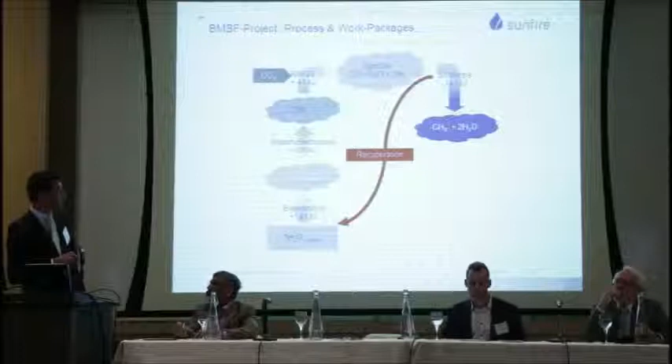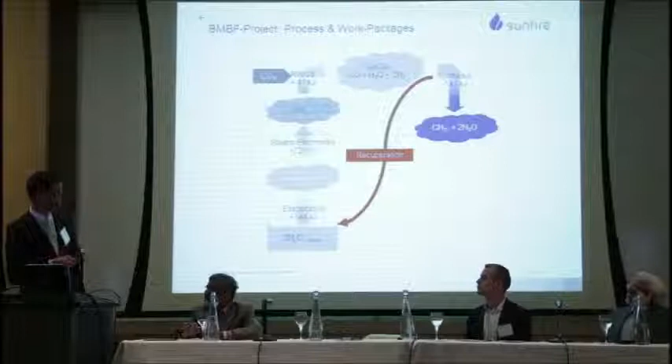The synthesis is always exothermic, so you will always lose energy that you used to turn liquid water into hydrogen if you cannot use this off-heat to produce steam. If you can produce steam, you will be able to apply the SOEC, which then takes steam to produce hydrogen and not liquid water, thereby saving 16% of energy in the very beginning of the process, and 16% energy efficiency increase in an energetic process is tremendous.

Some of you may work in the refinery. If you get 0.5% more efficiency in a refinery, you will be a millionaire. So 16% more efficiency is good. This is why we work in many institutes and companies worldwide on the steam electrolyzer.

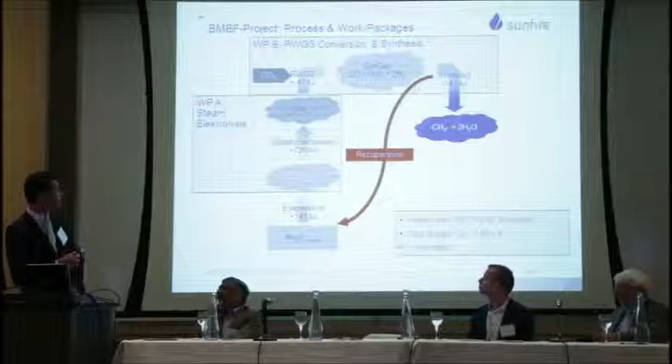We're currently having a project, sponsored by the BMBF, the German Ministry for R&D, and we have 2 main work packages, though there are more. Work package A is steam electrolysis, and work package B is taking the hydrogen from the steam electrolyzer together with CO2 and turning it into hydrocarbons.

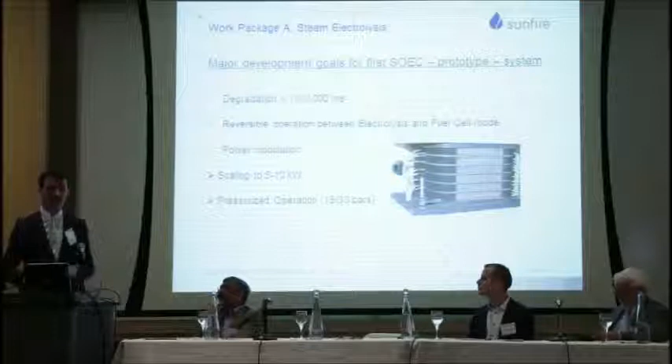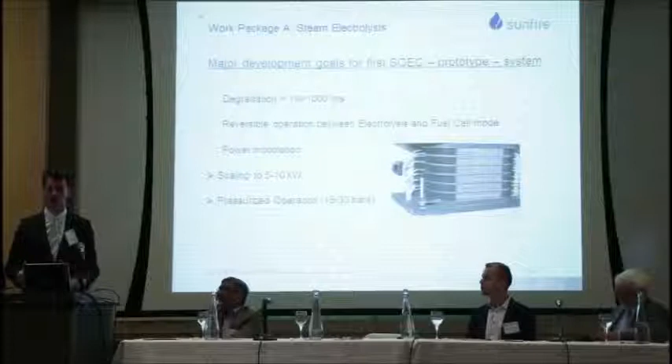Where are we at the steam electrolyzer? This is important: our goal was to create a stack generation with less than 1% degradation per 1,000 hours, that can be run in a reversible mode. On one side, produce hydrogen - once energy is there, it needs to be stored. On the other side, also take hydrogen or hydrocarbons and turn them back into electricity once this is required, and that can modulate flexibly according to the energy input from renewable sources. We also want to scale it towards 5 to 10 kilowatt, and run it at a pressurized level.

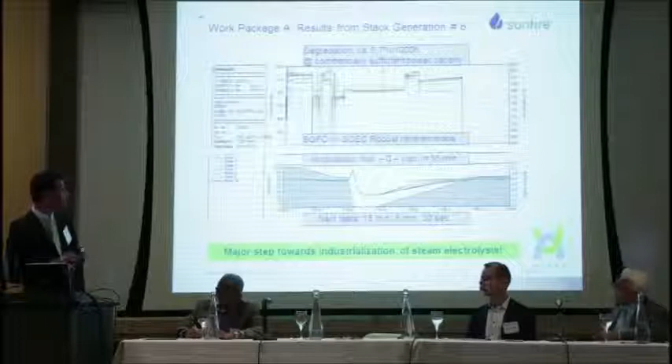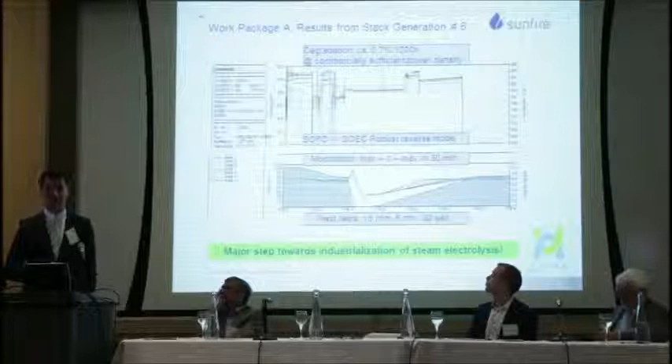And here we are regarding our development: the degradation is currently at 0.7% per 1,000 hours. That is really a very encouraging result. When we started 15 months ago, our degradation was 5.6% per 1,000 hours. So this is really good, and this is also at a commercially sufficient power density. I don't want to bore you with details here, but this is driven commercially.

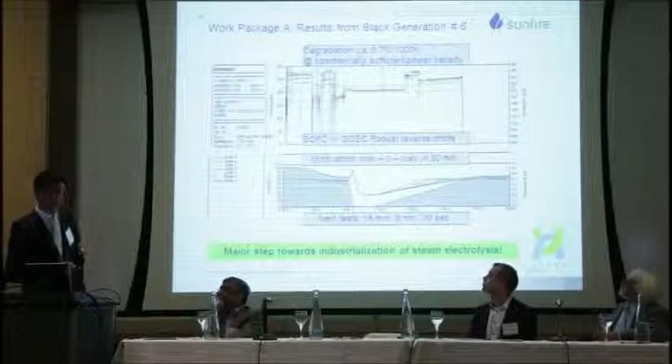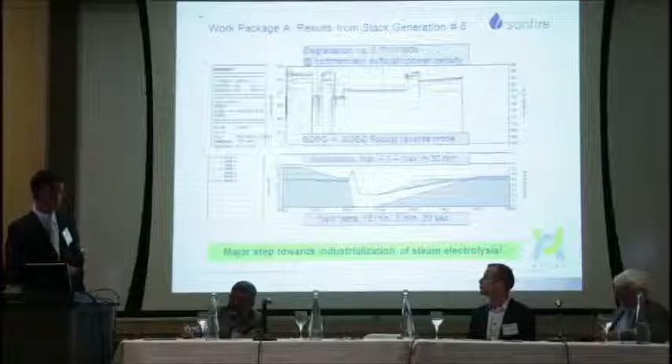The second thing is it is a robust cell and stack that can be run reversibly between SOFC and SOEC. The third thing we have shown is that we can modulate from maximum to 0 to maximum power within 30 minutes. We will now do tests towards 15 minutes, 5 minutes, and eventually, hopefully, 30 seconds. I have not convinced my people yet to do it, but I will do it in the end. This is really a major step currently towards the industrialization of steam electrolysis.

Steam electrolysis always has the reputation of not being industrially viable. We hope that this will change within the next month. These results are brand new, and we are currently publishing them in Germany and Europe.

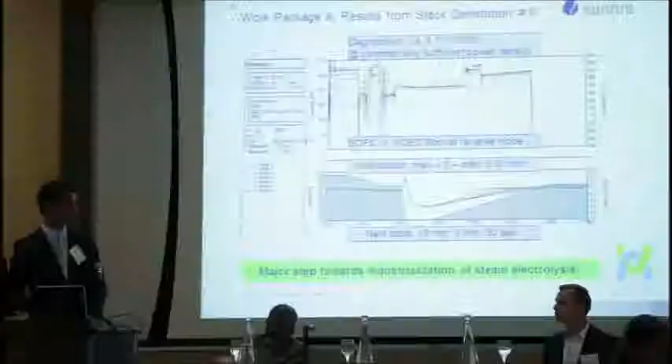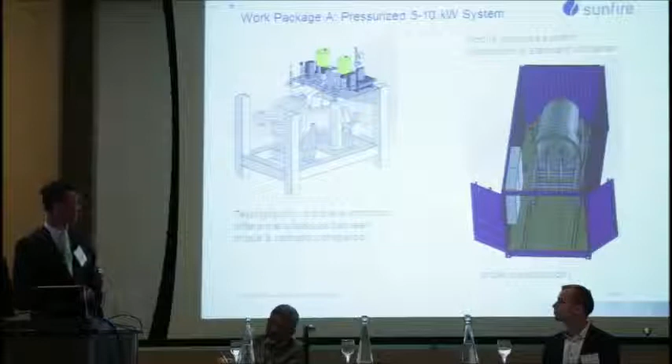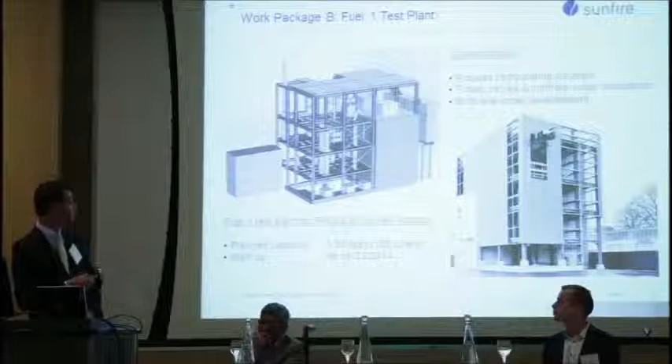This was work package A. Work package B is the current status of our Fuel 1 test plant. This was the plan, and now it's becoming real. This was the status in February this year.

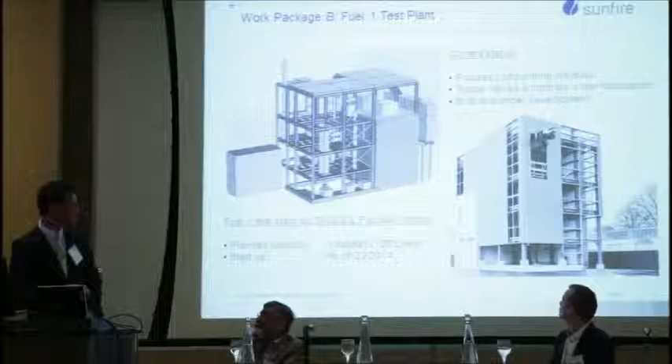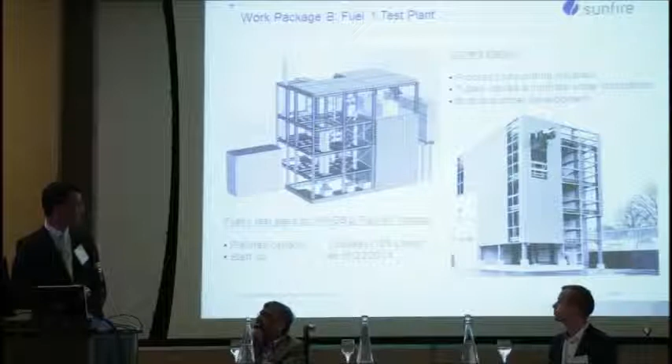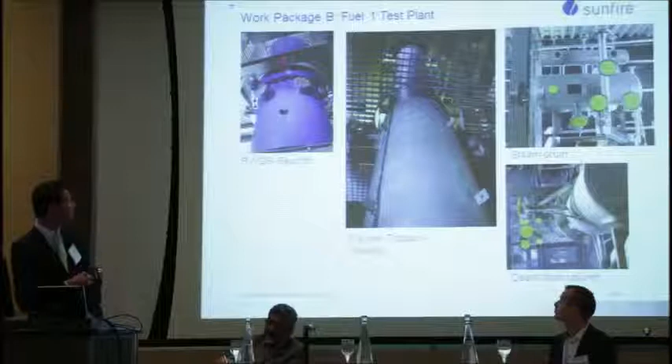I want to show you some pictures. This is our reverse water gas shift reactor, 3 meters high. Some of you know what this is important for. This is our Fischer-Tropsch reactor, 8 meters high and about that diameter. So it's a real Fischer-Tropsch reactor, not a lab scale anymore.

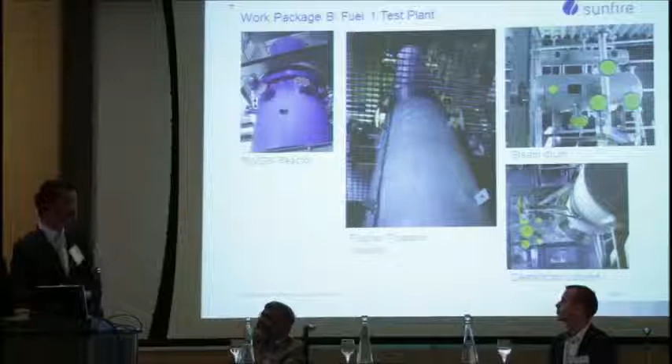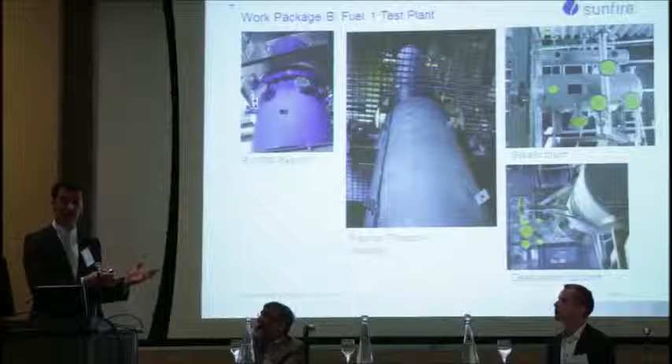This is our steam drum, which takes the exothermic heat from the Fischer-Tropsch generator and provides it to the electrolyzer so that we can use steam instead of liquid water and thereby save the energy, which I explained in my introduction. And this is the distillation column.

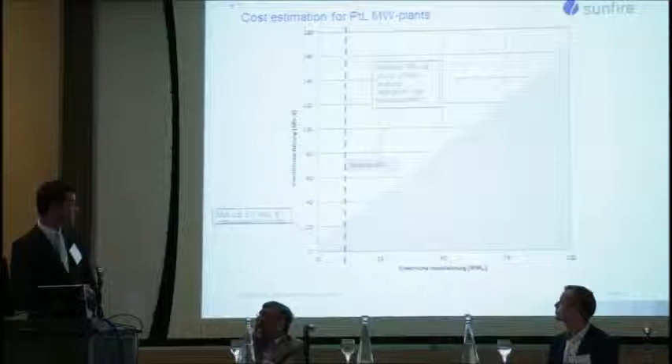Now, we talked about the commercial viability of energy storage via liquid fuels, PTL, power to gas, whatever. Here I show you some cost estimation for the megawatt scale. And the problem is that if you build such a plant as you have seen here, you will not be able to go below something like 5 million euros, because you have certain installations—the number of tubes is the same, the number of valves is the same, the controls are the same, and so on.

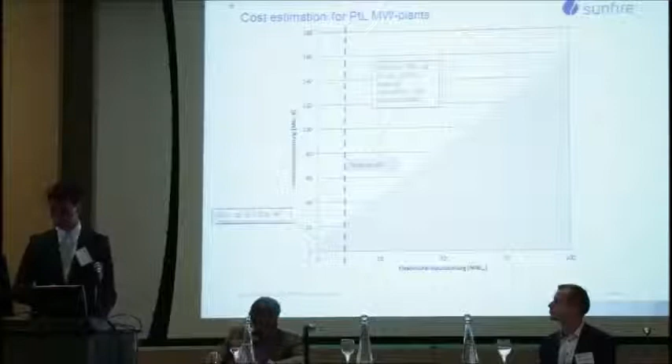So even if you produce just 1 liter of fuel per day with this kind of plant—one that can really provide high quality fuel—you will probably not end up below 5 million euros. So you will have to get a certain scale in order to get a positive IRR. We currently guess that 10 megawatts would be something we could run at a positive IRR. But there are regulatory risks which I want to emphasize later. So it's a risky business model because it depends on government regulations, and no investor will believe the government will keep up those regulations for 20 years.

Let's get away from the technology. What is the strategic problem for storage technologies and business models currently? The Energiewende in Germany, the conversion of the energy sector from fossil to renewable sources, needs storage capacity to ensure two things.

In the new Energiewende scenario, it's different. The consumer becomes a prosumer. He also produces small-scale energy and feeds it into the grid, and this energy then needs to be distributed via the grid to other prosumers. The problem is that those grids are not large enough to cope with the energy feed-in, so we have bottlenecks within our system. And therefore, we need a compensation load and can store via power to gas or power to liquid.

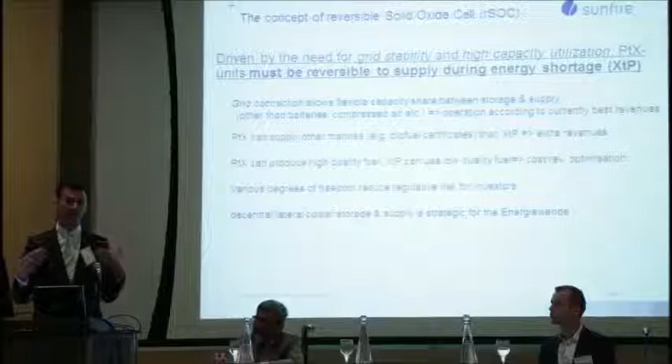And those various degrees of freedom will help us decrease the risk for the investors, because under changing regulations, they can always change their mode of operation from SOFC to SOEC and back, and they can change the fuel they use, they can change the market that they sell the produced or stored fuel into, and so on.

So from the first response that we got from investors, this is a far better business model than any pure storage unit. I have to say that here.

I know this may raise some questions, I'm looking forward to the discussion. But we at Sunfire believe that in the next 5 years, we'll probably not be able to sell large power storage plants if we are not able to run them reversibly. Maybe we'll find an investor to build it, we will be happy to build it, but currently we have not been successful yet.

I'm done. And the other thing is it will be a decentral power storage and supply unit, which is strategic for the Energiewende, as I heard earlier. Let's make it real, and thanks for your attention.

Okay, so this is going to be a slightly more technical presentation.

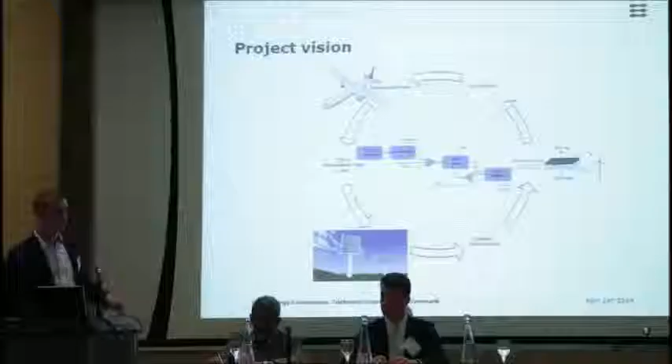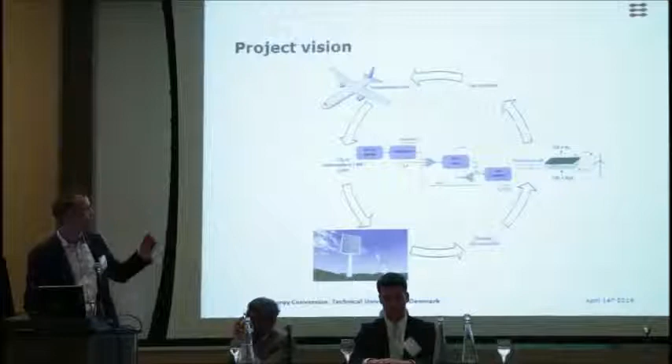You've seen various versions of this figure before. We just heard about doing steam electrolysis and then reacting with CO2 afterwards. The vision for the project I'm working on is capturing CO2 from the atmosphere, as we heard before, and then doing co-electrolysis: you feed both the steam and the CO2 into an electrolyzer cell, and then produce fuel. In a conceptual model of what such a system could look like, we have the air capture part, then a purification step and a pressurization step before we reach the electrolyzer stack. Those are the two focal areas of my project, and what I'm going to talk about here.

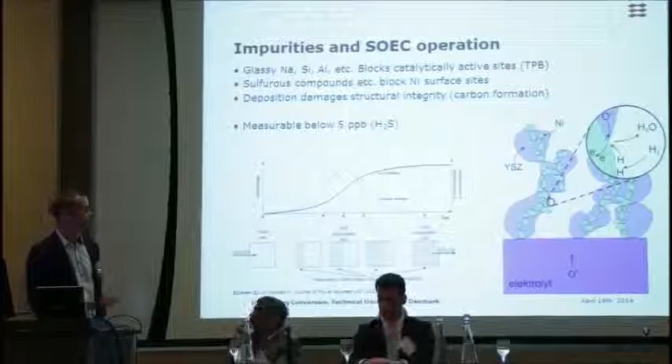Just a little bit about solid oxide electrolyzer cells. If you look at the figure on your right, that's a half cell consisting of the electrode where the electrolysis reaction takes place. The blue phase is a ceramic backbone that conducts oxygen ions, the green phase is the electrocatalyst, that's nickel, and the white background is a porous phase. Where these three phases meet, we have the three-phase boundary, and this is the catalytically active site.

I'm telling you this because this is one of the main areas where impurities in the reactant gases sit, react, and form glassy phases that can block these sites. Also, the nickel surface is active in the process, and various chemical species will adsorb on the nickel surface and block that. Finally, we can have deposition of carbon and others that can block the porous phase.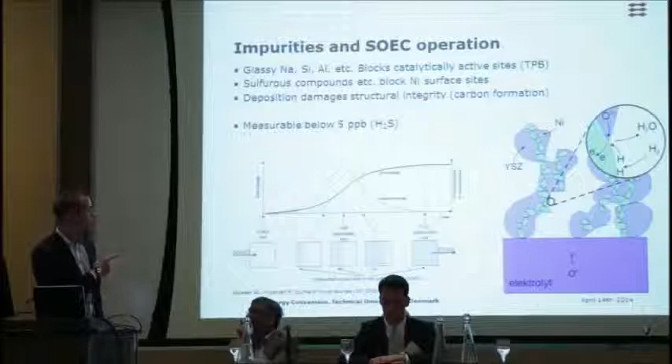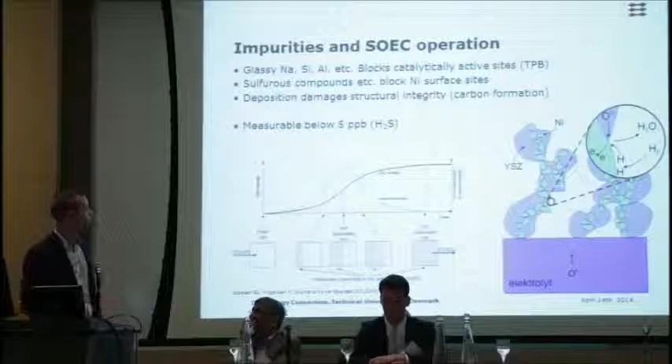On your left, you have a figure showing cell voltage over time at a constant current. As the cell is poisoned, in this case by hydrogen sulfide, you see on the black curve that the cell voltage rises as the surface is blocked. This experiment was done for concentrations of hydrogen sulfide down to 5 ppb - very, very low levels of impurities that are problematic for electrolyzer cells.

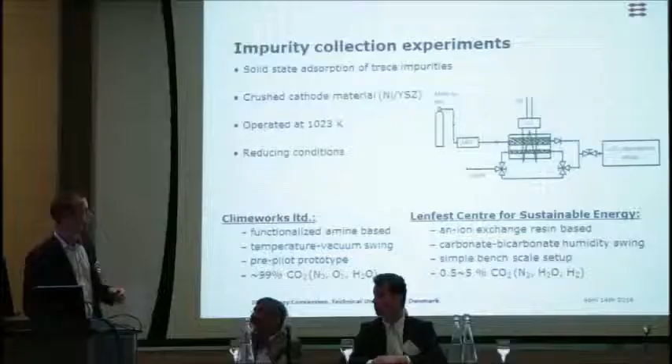In order to test this, which is kind of difficult with conventional gas analysis equipment, we built a setup where we adsorb impurities in the gas stream from various air capture technologies. We adsorb them on crushed electrode material - we take the electrode where the impurities would sit and poison it, crush it, and use that as a filter. You can do that for protecting the cells, and in this case we did it for capturing the impurities, then we could do elemental analysis on that afterwards.

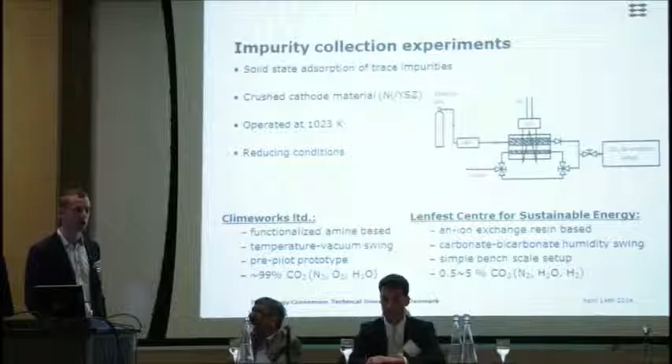I looked at two different systems. One is being investigated by a company in Switzerland called Climeworks, and the other one is investigated here by Klaus and his co-workers.

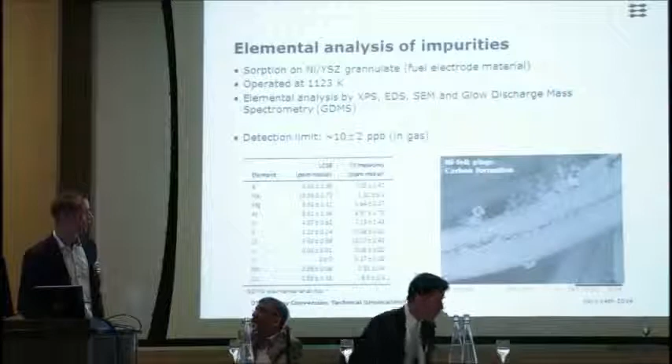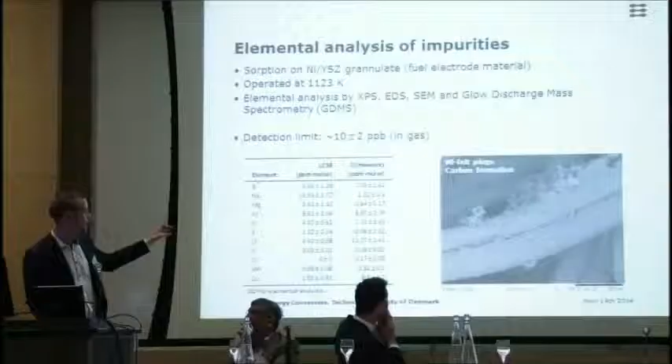So the results from that, looking at the filter material that comes out with various different techniques. The most important one is called glow discharge mass spectrometry - that's a technique where you basically vaporize the sample and look at what comes off. We tested for 25 different elements in the sample, and as you can see in the table, there are a lot of different impurities still, or left in the filter. This is ppm by molar in the gas stream, so these levels are quite high compared to what you saw before, which was the 5 ppb.

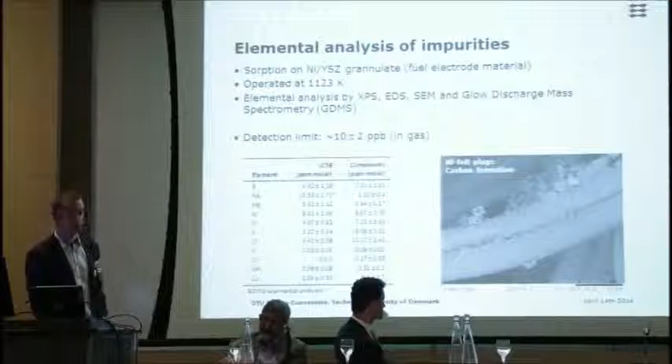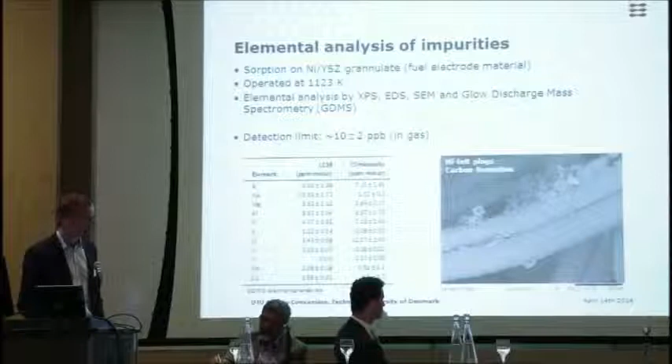So there's definitely a concern here if you want to use air captured CO2 in at least solid oxide electrolyzer cells. On your right, that's an electron microscope image showing part of the filter, and you can see the sort of gooey stuff that sits on those wires - that's deposited carbon. So there is a carbon deposition thing going on as well. That is usually not a problem in electrolyzer cells because there will be a lot of water there which suppresses the carbon formation process. But what is to take home from this slide, I think sits up here.

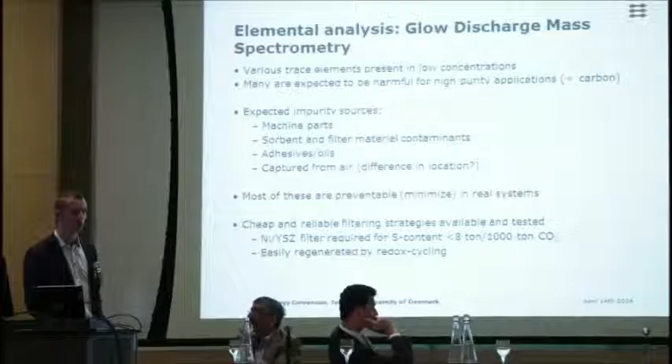There are various trace elements present in low concentrations. They are also known to be detrimental to durability of solid oxide cells, but they're in low concentrations. Sources from them could be various machine parts in the setups.

It could be contaminants in the sorbent materials. It could actually be captured from the atmosphere. Here in New York City, various kinds of sulfurous components could be envisioned to actually be captured, and I think we know that that is going on.

But we assume that these are preventable, or at least we can minimize them by carefully selecting the materials for the systems. And also they can be filtered out. We know that activated carbon filters take out some of this, but also we can use the filters that we used in this analysis to take it out.

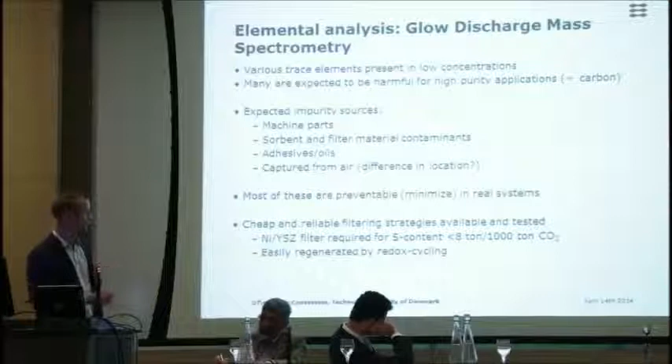With the current sort of layout of those filters, we need around 8 tons per 1,000 tons of CO2. That's a lot. That could probably be lowered by, I would guess, a factor of 10 maybe. But also these filters can easily be regenerated by flowing air through them, oxidizing the nickel, and then you'll get rid of most of the impurities, and you can reduce them again and use them again.

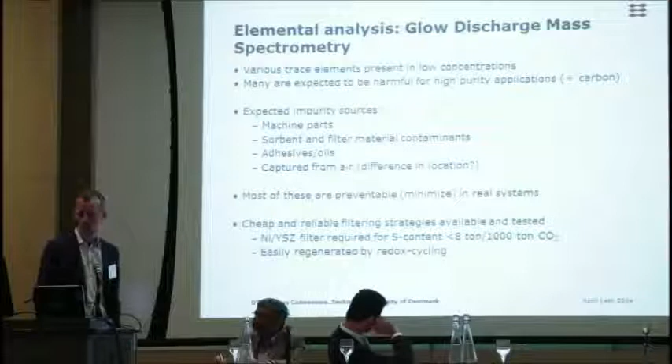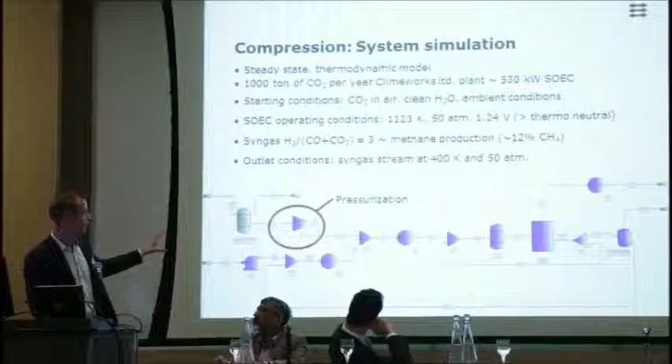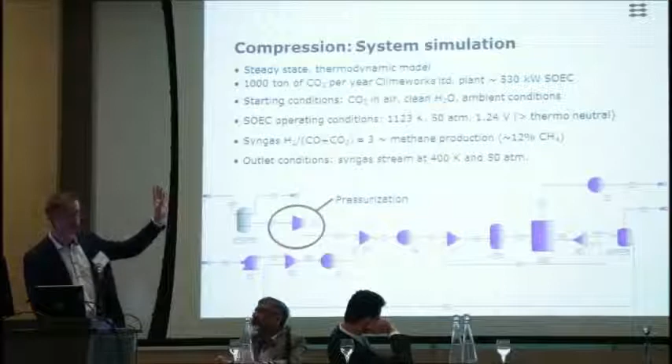Okay, moving on to the compression of CO2 or the pressurization. This is a model that I'm working on, and it looks like the one you saw before. You have the CO2 and the water in inlet streams on your left, and then it produces synthesis gas. So that's where I sort of cut the model.

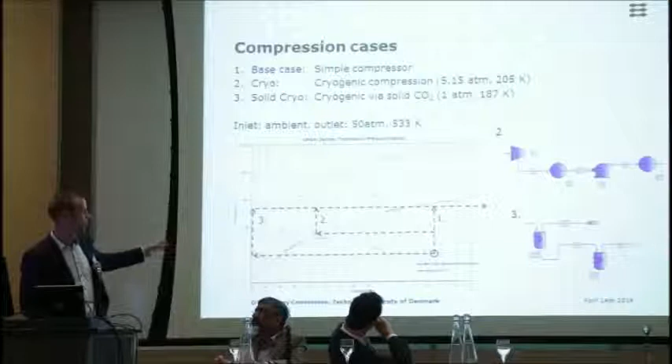There are various strategies for pressurizing this CO2. This is the phase diagram of CO2. You have the temperature on the x-axis, and you have the pressure up here, on a logarithmic scale. What you see over there, that's ambient conditions. That's where we start with the CO2.

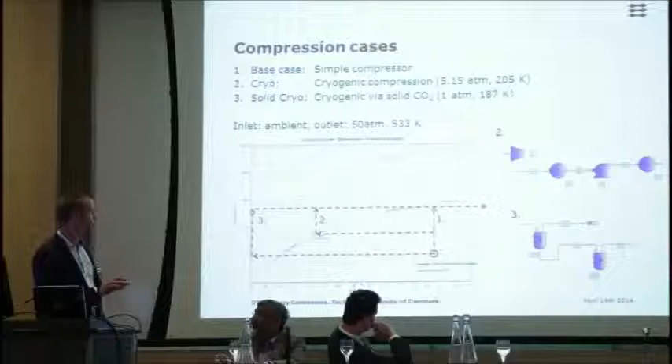One thing to do is to compress it directly to 50 bar here and then heat it up. So that was one case I looked at. The other one was pressurization and then cooling down to liquid CO2, followed by evaporating it at higher pressure, or you could cool it straight away to solid CO2 and then evaporate it at higher pressures as well.

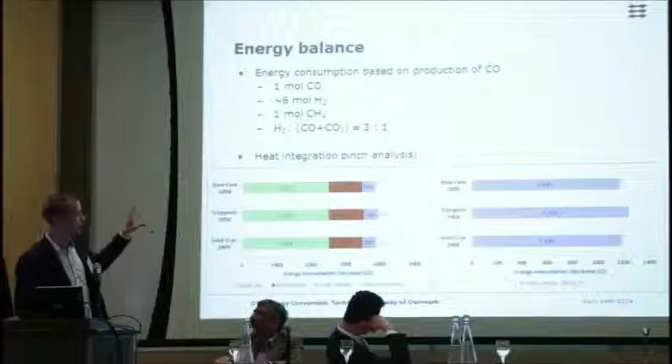The red and the blue parts are minimum required utilities, hot and cold, in this system. I haven't done heat integration, so I haven't synthesized the heat exchange network here, but this is from a pinch analysis, so this shows the minimum required utilities. And then there is a small yellow contribution, which is compressions and pumps.

What you see here is that there is not a whole lot of difference. If we subtract the delta H, you can look on your right here - that's sort of the differences between the 3 cases - and you see that they are very similar, and actually that the compression seems to be the one that comes out the best.

One of the reasons for this, and I'm sure that there are many, but one of them is that when we compress, we have had some efficiency losses. They come out as heat, and as we're heating up the CO2 afterwards, at least in the model, that heat is not actually a huge problem here. So that's one of the reasons why the base case comes out like this.

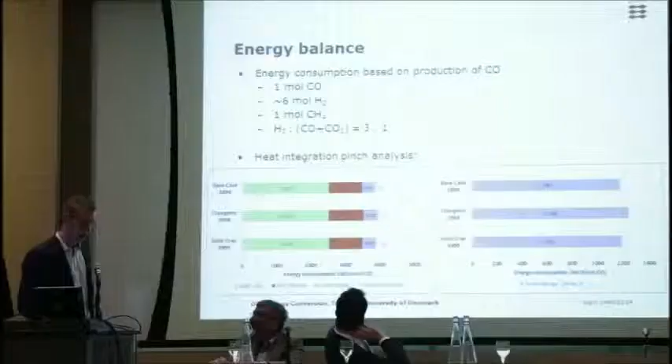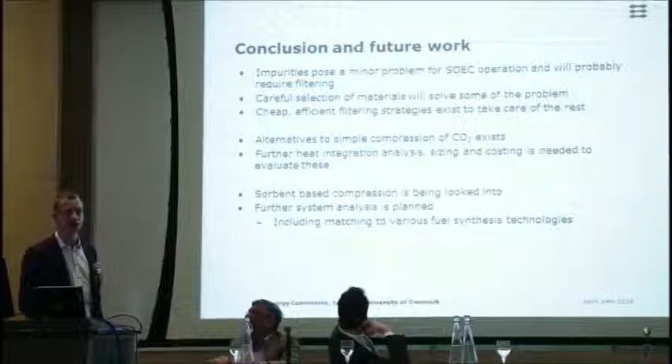So for conclusions: first, there are problematic impurities in the various air capture, or coming off the various air capture techniques. They can be filtered out, or they can be selected out by selecting the right materials for the systems. Also, there are different alternatives to simple compression, but further analysis is needed to see if there is actually something to gain here.

One thing that was important was that this compression step is a very small part of the overall energy consumption of this process, so it remains to be seen if this is actually important to minimize. But again, small minimizations could be what puts us in or out of business here.

And then finally, we're looking into other compression techniques based on sorbents, just like we use the sorbents in the air capture to go from 400 ppm to atmospheric pressure. You could imagine using a similar sorbent going from atmospheric pressure to 50 atmosphere, if a sorbent that can do that could be found.

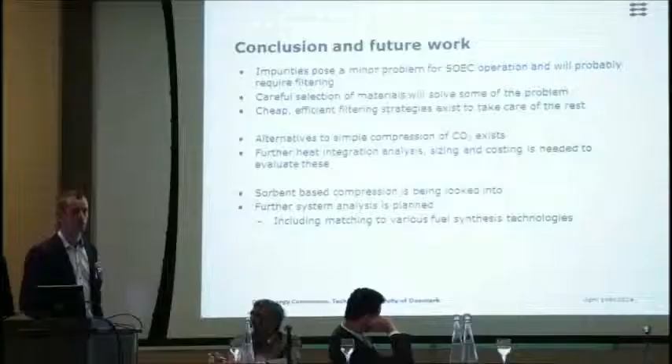And then the last thing to do is to integrate the model that I showed you with a fuel synthesis to look at the overall economics. So yeah, that's it. I'd like to thank my co-workers and collaborators and sponsors.

Thank you. Thank you, Søren. Søren actually beat his time by 5 minutes. That doesn't mean you get extra time, John. You're up next.

Thank you, Mr. Chairman, and thank you for inviting me here. It's always a pleasure being here. I've been asked to talk about methanol synthesis from CO2, and it's fortunate that the chairman believes this is the best chemical. I have a different opinion — it's actually dimethyl ether, but we can make dimethyl ether from one simple dehydration step. Yeah, or we can make it in a combined way, but we can talk about that later.

Well, I'll start with a few qualifying statements. I've been working for this gentleman, Dr. Haldor Topsøe, for almost 40 years. Unfortunately, he passed away last year, 4 days before his 100th birthday. He was a guy with long-ranging visions, and that's why he was also very interested in this subject. He founded the company I'm working for, and we are around 2,700 employees working worldwide, generating around 700 million euros revenue.

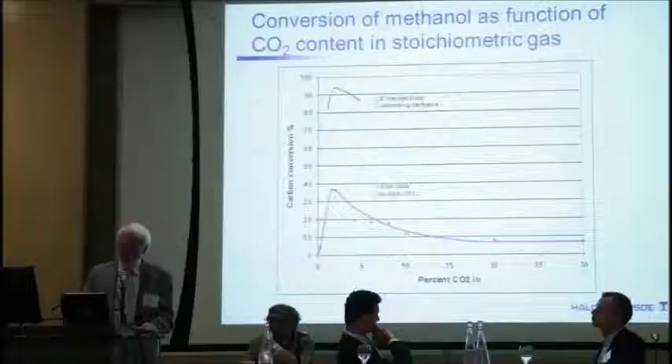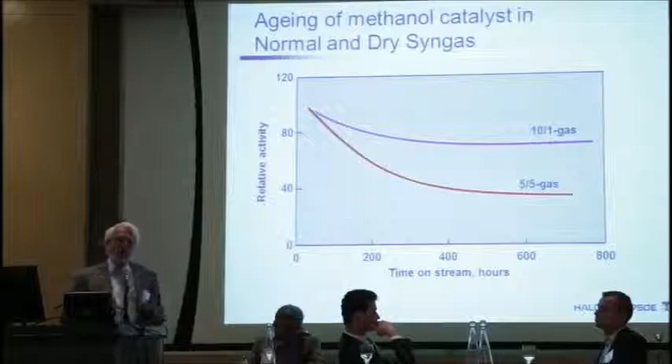Furthermore, the rate of degradation of the catalytic activity is also a function of the synthesis gas composition. If you have a very CO2-rich gas, you get a lot of water and degradation due to the presence of steam. Whereas if you have a more CO-rich gas, you get a drier gas, and copper sintering and other degradation phenomena are slowed down.

Making methanol from CO2 has been written about a lot lately, but it's actually an old thing. When I started in the R&D division of Topsøe, my first assignment was to make methanol from CO2, back in '79. We also do it on a commercial scale today, because almost all methanol worldwide is made from natural gas.

But if you start with methane, you don't get a stoichiometric gas, so it pays off to add some CO2 to get a more balanced synthesis gas. You can do that by doing reverse shift within a steam reformer.

Here you see a picture of 2 of those from an actual plant, where we take CO2 from a nearby ammonia plant and add it to the natural gas, boosting the production capacity. These 2 streams could also be renewable methane, like we talked about—we have the process for that.

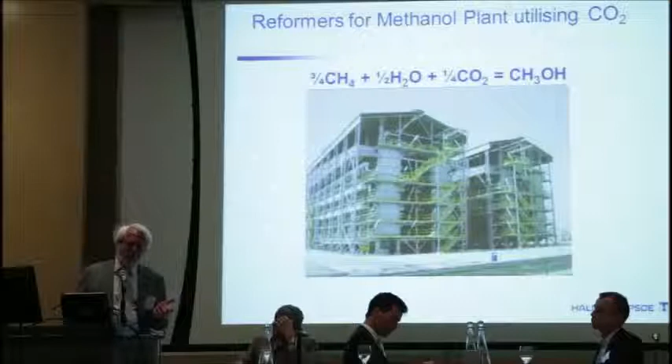An interesting thing I don't have time to get into: if we gather all these small producers of biogas, for instance, they're far too small to make economic methanol production. But we could gather it in the natural gas grids and build larger methanol plants, also taking the benefit of district heating from these plants, built in normal commercial sizes.

So I tend to disagree a little bit with all this. I think we should generate the syngas, or the constituents, or the feedstocks for the methanol decentralized, but then perhaps build bigger commercial sized units close to city centers, because these plants are non-polluting and so on. That's just a thought.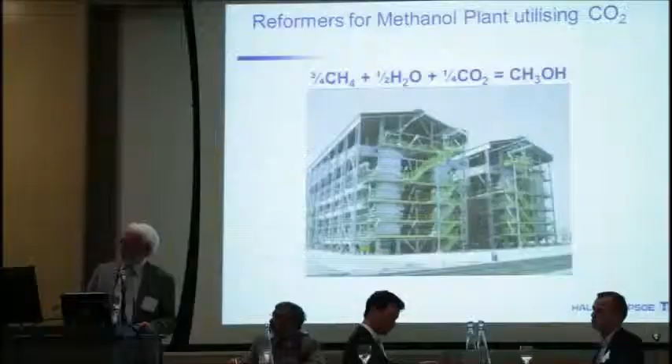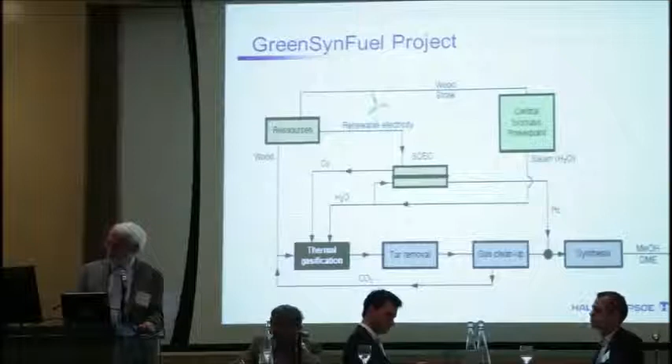We have looked into 2 different ways of integrating solid oxide electrolyzers into methanol production. One is by wood gasification, which is also a presentation in itself. You have to remove different substances—tars, sulfur, and so on. We know how to do that and have demonstrated it. Then you can make methanol.

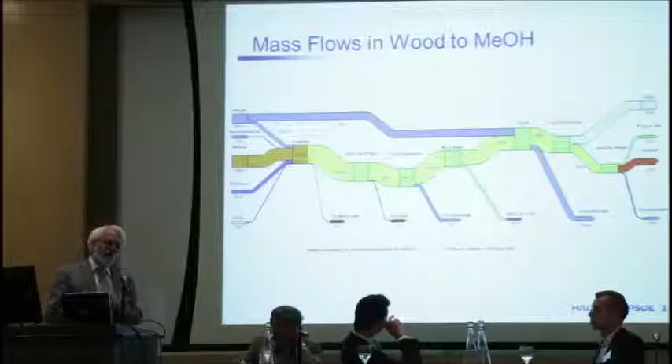If you do that, you also need to adjust your synthesis gas composition, because biomass is fundamentally CH2O, roughly. So there's too little hydrogen in the biomass to turn it into methanol.

So what we do is add oxygen to the gasifier to get the conversion going. Then we remove all the impurities, the tars and so on, and do water gas shift in order to get more hydrogen. Then we throw away a lot of CO2, biogenic CO2.

Remember, the trees have done Klaus's job, perhaps a little slower, but they have removed CO2 from the atmosphere, and now we throw it away again—700 tons if you have a 1,000 ton dry wood based plant. And you'll make 520 tons of methanol out of this.

If you now add a solid oxide electrolyzer, just producing hydrogen, you see the mass streams here. The hydrogen stream is not very prominent because we're talking kilos here, but in energy terms it's quite significant. Now we can convert all the carbon in the feedstock, so we double the methanol output—1,050 tons per day of methanol.

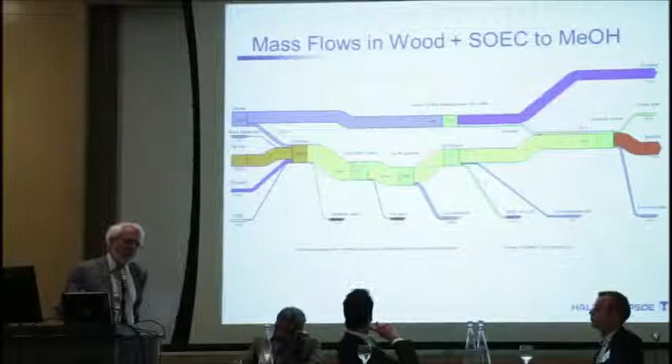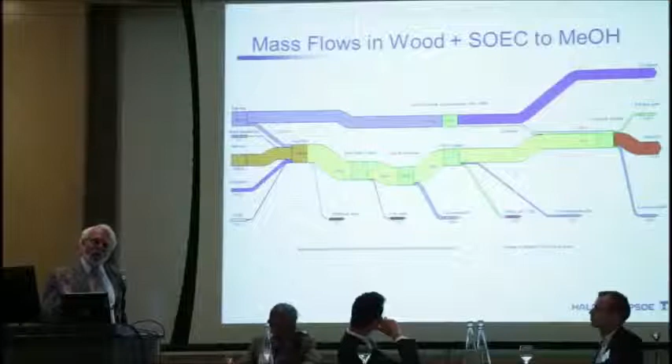And we also generate 750 tons of oxygen, and I can use one third of that for the gasifier and throw away the oxygen plant. Except if I have to rely, as alluded to by Christian, on fluctuating electricity prices, so I don't get low prices all the time. Then I'll have to design the plant for, say, minimum one third solid oxide electrolyzer in order to provide the oxygen. I don't know what to do with the rest of the oxygen, but that's another story. At least it's not harmful for the atmosphere as far as I can see.

But if you compare the efficiencies of these two routes, you can also see we can transform dry wood into methanol with roughly 60% efficiency, and we get some district heat, which is very important, at least in Scandinavia. And it counts, although the exergy is not that prominent, people really pay for it, and the alternative is to burn other stuff. But if you prefer second law efficiencies, then the solid oxide alternative is also quite prominent. But even in lower heating value terms, we get a very nice efficiency around 71%. Of course, this is cheating a little bit because electricity is pure exergy, but nevertheless, you get a good energy conversion efficiency.

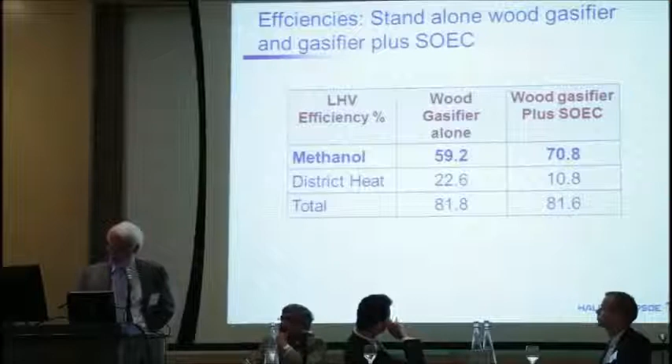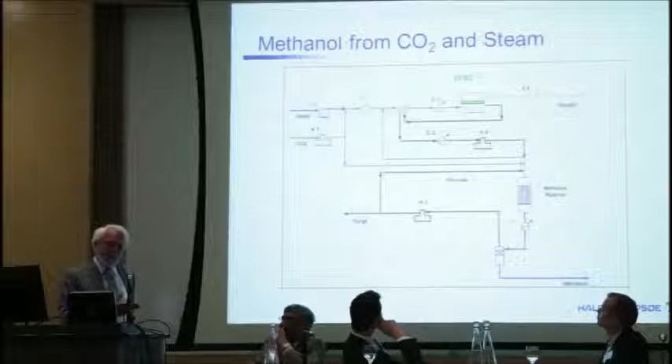Okay, I'll end up with what this conference is all about, as I hear it: utilization of CO2 from the atmosphere. And I've studied a case where we start with water, CO2, and electricity. And there you can either operate the solid oxide electrolyzers at pressure, or you can send different amounts of CO2 through the solid oxide electrolyzer, different amounts of co-electrolysis. I believe that is the most important, or the most efficient, way of doing it instead of doing reverse shift outside the loop. And if you calculate using all these models I've talked about, our kinetic models and so on, heat and energy balance, you also realize that this synergy Christian mentioned, that we generate the steam we need for the solid oxide electrolyzer, we generate that in the methanol synthesis.

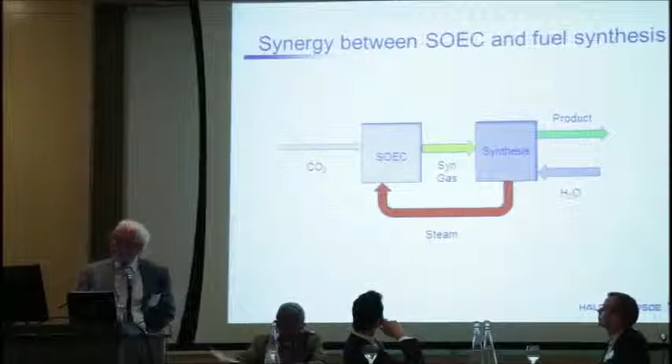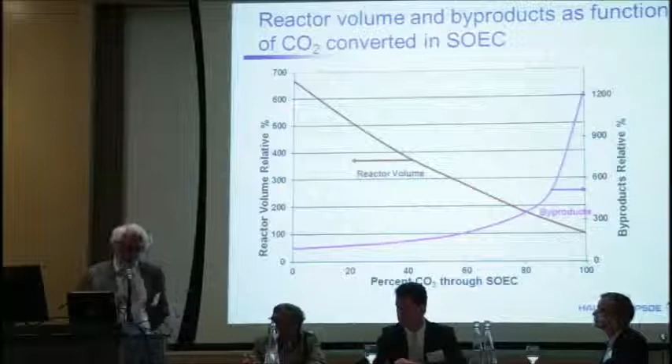That's very important. But the net effect is that if you plot the amount of methanol synthesis reactor volume you need to invest in as a function of the amount of CO2 you send through the solid oxide electrolyzer, you see that the amount of catalyst diminishes quite substantially due to both kinetics, thermodynamics, and degradation issues. On the other hand, the byproducts, the ethanol and other byproducts in methanol, goes up. If it's for fuel use, it doesn't matter. If it's for chemical use, it has a cost. So the optimum is probably around 80% co-electrolysis.

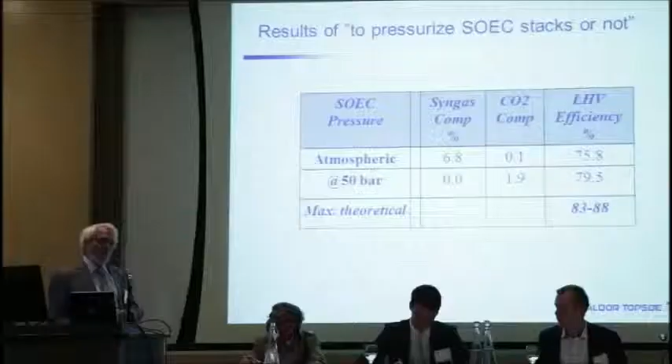The bottom line is: is it beneficial to pressurize the stacks or not? It is indeed. Because first of all, if you pressurize them, you throw away your synthesis gas compressor, which is a quite substantial investment. And furthermore, you get a better efficiency. Alluding to Søren's presentation, the energy invested in compressing the CO2 is very minor. It doesn't really matter, it's only 2% of the total energy efficiency.

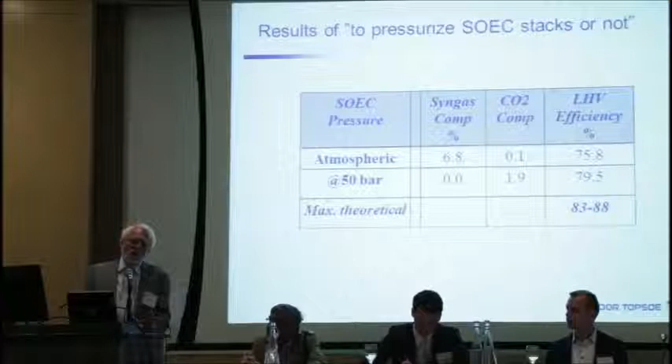And the overall efficiency of the whole conversion from electricity to lower heating value in methanol is very high, around 80% if you pressurize the stacks, which is a very wise utilization of renewable energy. And if you add the district heating you could also get, it would be a very efficient process.

So to end up and not aggravate the timekeeper, I would like to conclude that we can do it, we can build those plants today. We know how to build these methanol plants. That would be a piece of cake. We can supply them to you tomorrow if you want. What's lacking is the solid oxide electrolyzer, especially the pressurized ones, and of course, a cheap way to get the CO2. Because pressurizing would give us a better economy and better energy conversion efficiency.

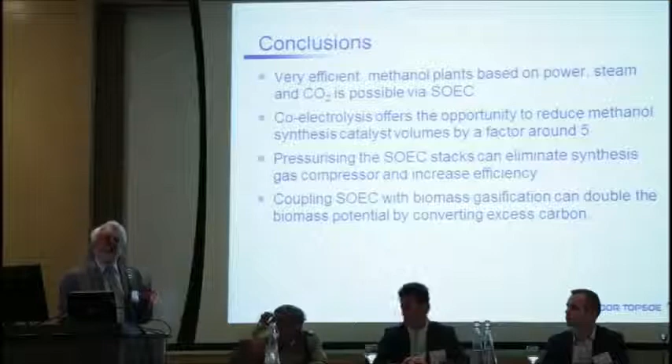Another pertinent point, in my opinion, is that until air capture is ready on a large scale, I think we have to rely on bioconversion routes, because that's an alternative way of CO2 capture. But as Mogens also said this morning, biomass availability is very limited, perhaps 100 to 200 exajoules per year globally. But if we combine them with the solid oxide electrolyzer or other electrolyzer technologies, we can double or triple the bio potential. And that's an important point, because I think that will be the starting point for implementing this type of technology. And with that, I thank you for your attention.